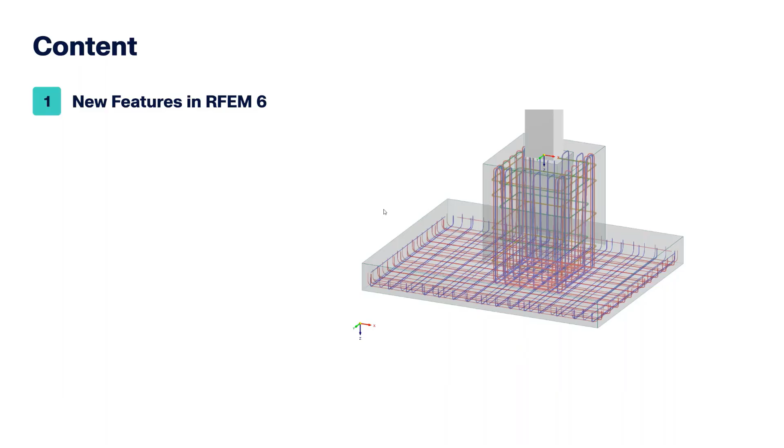For today's agenda: first I will show you new features in RFEM 6. Of course most of them are also valid for RSTAB 9, but as you know, if there are solids or surfaces, then it's only valid for RFEM 6. Then I'll show you new features in the add-ons and standalone programs, then new add-ons, and I'll look into the future at the end of the webinar.

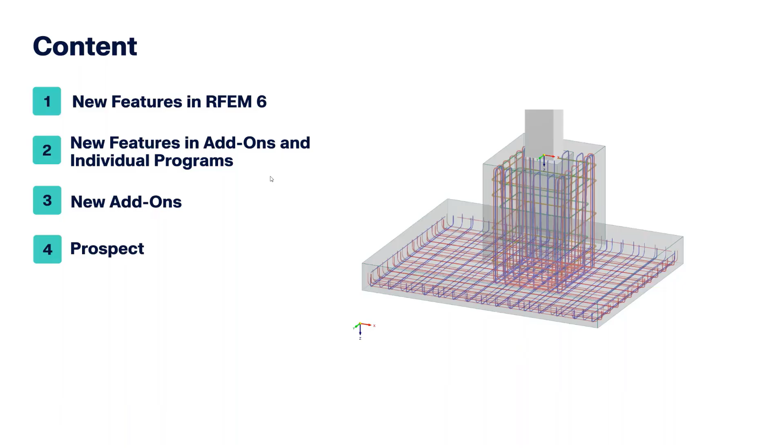Let's start with the features in RFEM 6. First, the result points. You can set such result points very easily on surfaces, solids, and also in the space for RWIND. Let me show that in RFEM 6.

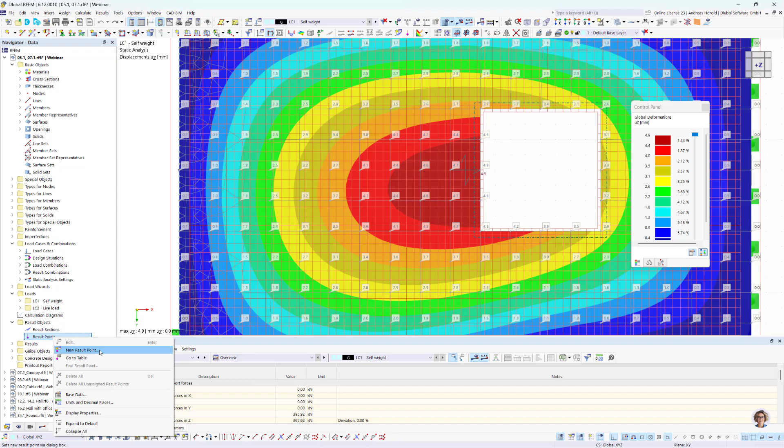In RFEM 6, you can find the result points in the navigator data under result objects. If you right-click on result points, you can select new result point, then select any point in the system, and the surface is detected automatically, as you can see. And you can see the new result point, also here in the folder under result points.

Much easier is to use that button above, new result point, and you can easily set certain result points, and they are also here. And if you want, you can delete any surface result point. Okay, that's all for this feature.

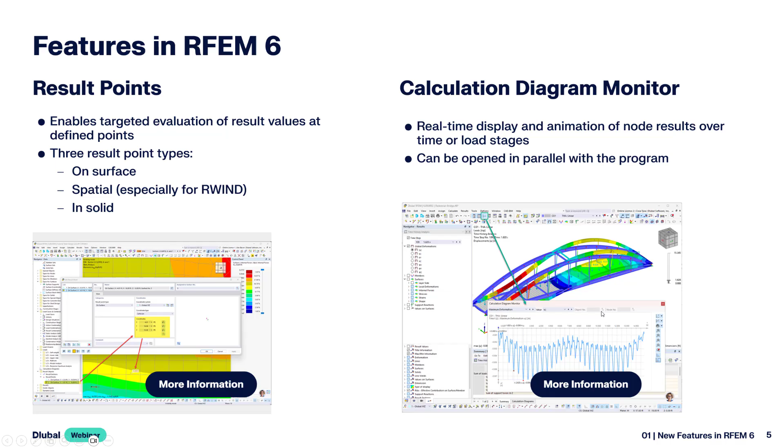We turn to the next feature, back to the PowerPoint. New is the calculation diagram monitor. You can use that, for example, for dynamic analysis or something like that.

Then the thickness type wall shear free. If you want to use, for example, a masonry wall in a 3D model, and it shouldn't stiffen the system because of the masonry wall, then you can use such a wall shear free.

Then the new member type result line. It's the same function as for the result members, but you don't need to define a cross section. Only the result line and the area that you select will be integrated. For this area, the results will be integrated in the result line.

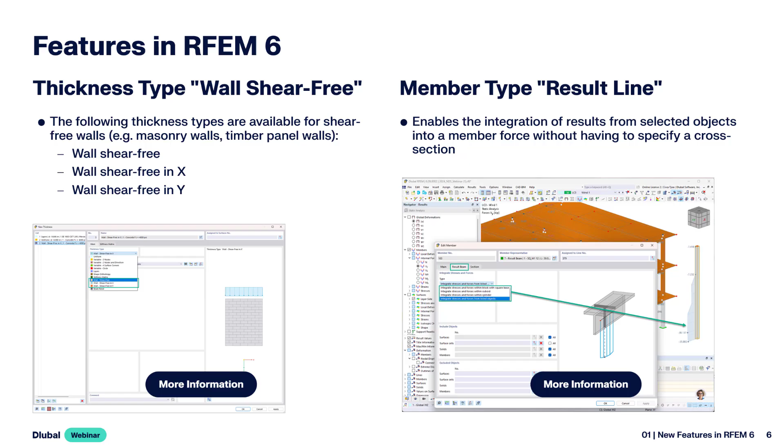Then error messages for invalid and deactivated objects. You can see the error message before the calculation. I will show that in the program.

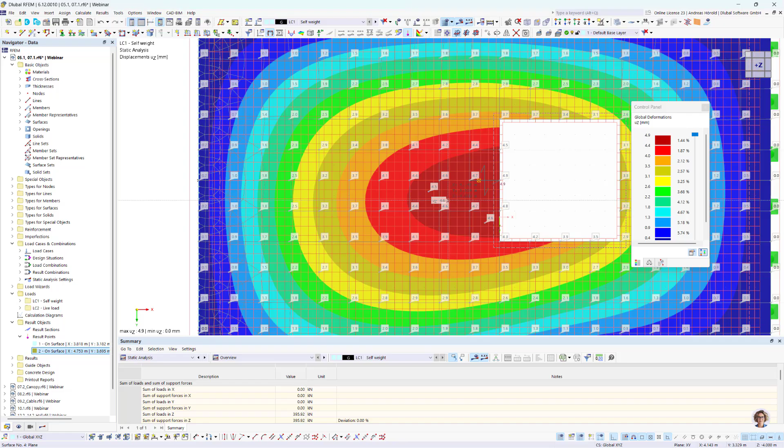The same model, a model of reinforced concrete. If we switch to the concrete design, where all members and surfaces are selected, and also the nodes with punching, that makes no sense in that case - we don't have a support in the middle of the surface, for example. So you can see under overview where the error messages are before you calculate the model. And for example, if we deselect all the punching nodes, then there's no error message.

Okay, then next feature: life cycle of design results. The results will not be deleted if you want, but they are declared as invalid. And when the calculation is restarted, only the invalid results are updated.

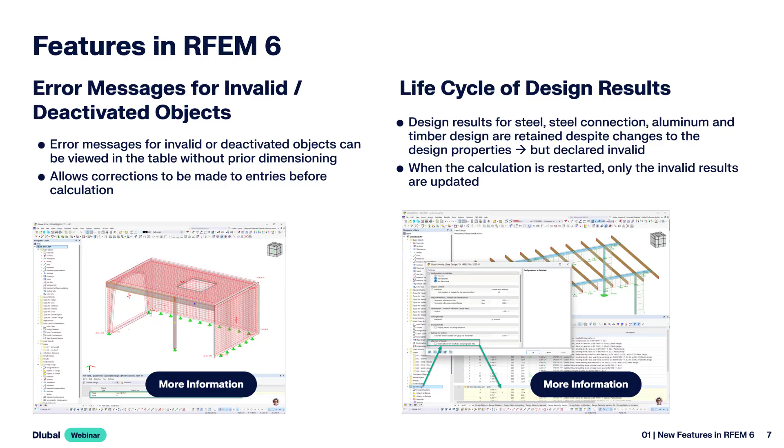I would like to show you that also in the program, on another model. For example, for this model, the timber design of the purlins was already done. And if you change the settings for one of these, or for all - for example, I enter or change the service class from moist to wet - then all results would be deleted. We don't do that at the moment.

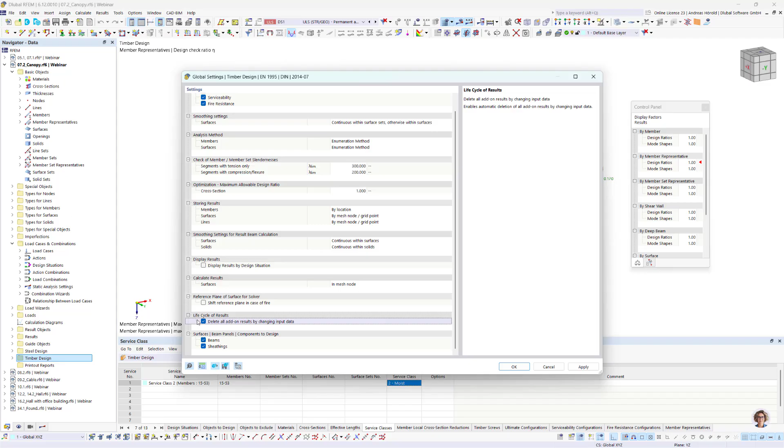First, I turn to the timber design here, right-click on it, then settings. If I don't want to delete the results, I have to uncheck this - this was the default setting, with the check, and I uncheck it. So now when I change to wet, the results won't be deleted, but they are declared as invalid. And if I recalculate all again, then the invalid results will be overwritten.

Often with wished features from our customers. So then the next one: you can now log in via your Microsoft account.

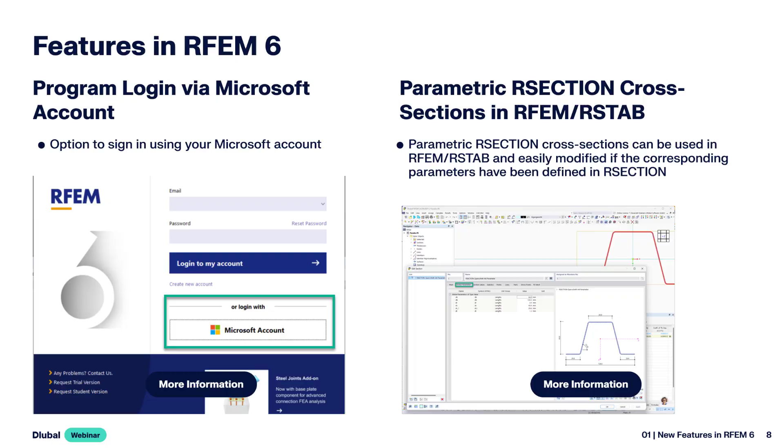Parametric cross sections that you parameterized in RSECTION can be used in RFEM 6 and RSTAB 9, that's clear. But the parameters can also be changed directly in the main programs, RFEM and RSTAB. I would like to show that as well. That's a parameterized cross-section in RSECTION. Take a look at the parameters - they are changeable. You can do that here, of course, but also in the main program.

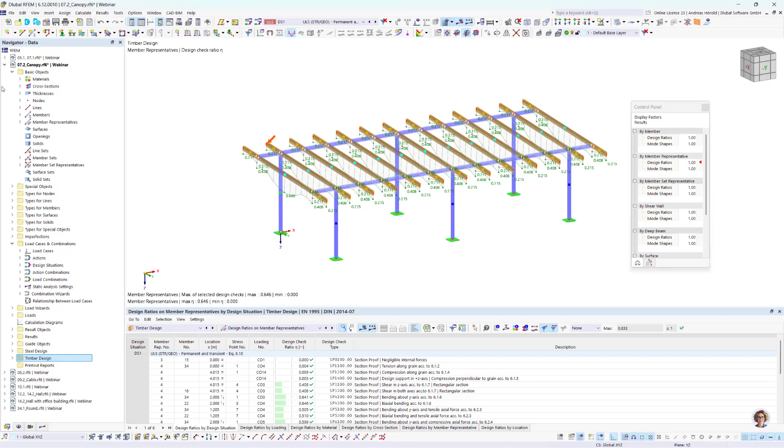So I change to that model. The parameterized cross-section is used. If I double click on it, then I can change the parameters here. And you can see all will be changed.

Okay, then the next feature: the Dlubal API is new, the gRPC. It's up to 15 times faster than traditional technologies such as SOAP or REST.

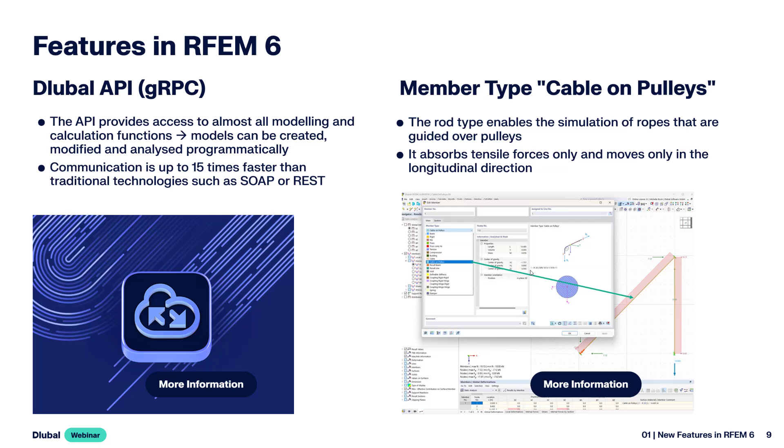Then use also the member type cable on pulleys. We had this feature already in RFEM 5, but now it's also available in RFEM 6. You can simulate ropes that are guided over pulleys. I showed it also in the program.

On the next model, you can see that simple model. At the moment, it's only a cable. You can see the internal force, 20 kilonewton, is only in this member here.

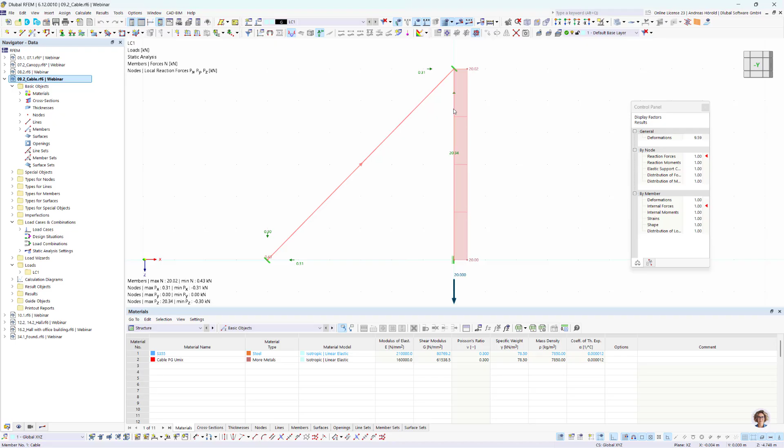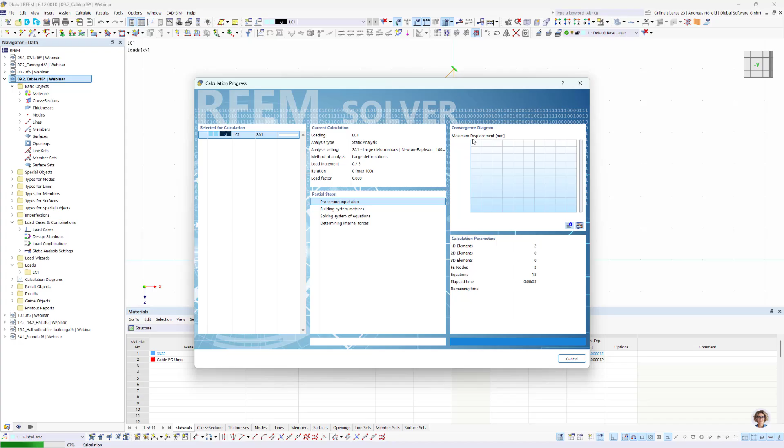And if I change both from cable to cable on pulleys, and then recalculate all, then the internal force of 20 kilonewton should be in both members - also in the diagonal member here.

Okay, next feature: nodal link type for nodes. Nodes are automatically connected to neighboring objects. I would like to show that also in the program. You can use that when you import models from a CAD program, for example.

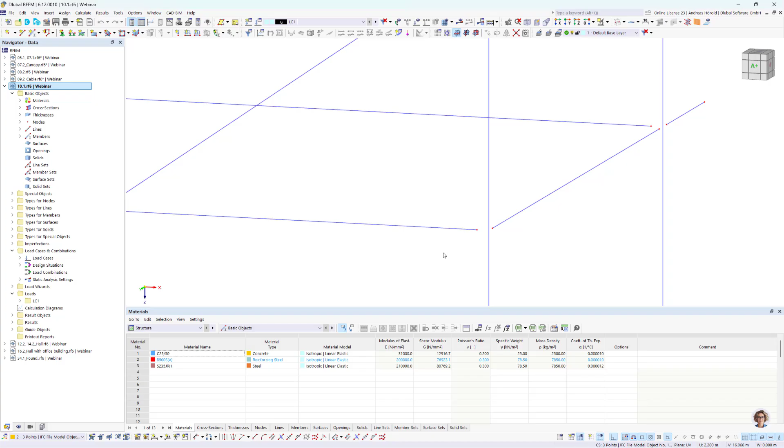Let's show that on the example. Imagine this model was imported from a CAD program, and if you switch to the wireframe model, you can see the members are not connected. You can fix that quite easily when you select, for example, all the nodes, then right-click on one node, edit, and then link - that's the new feature, link to nearby objects.

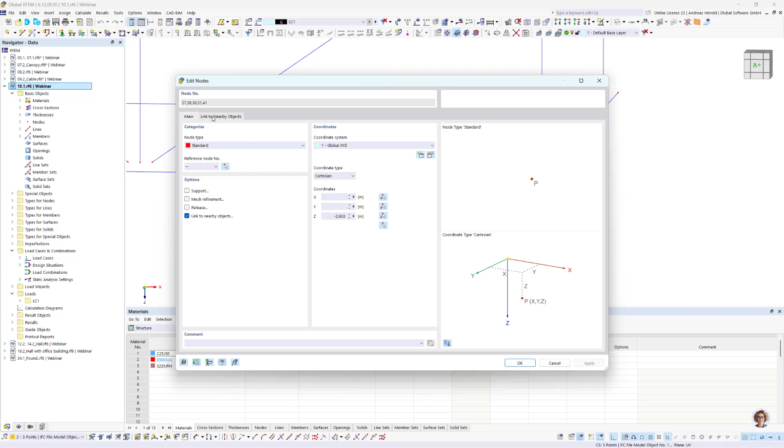So I have to create a new nodal link, connect or link to members. Then you can enter a search radius, press OK. And now all is connected by rigid members.

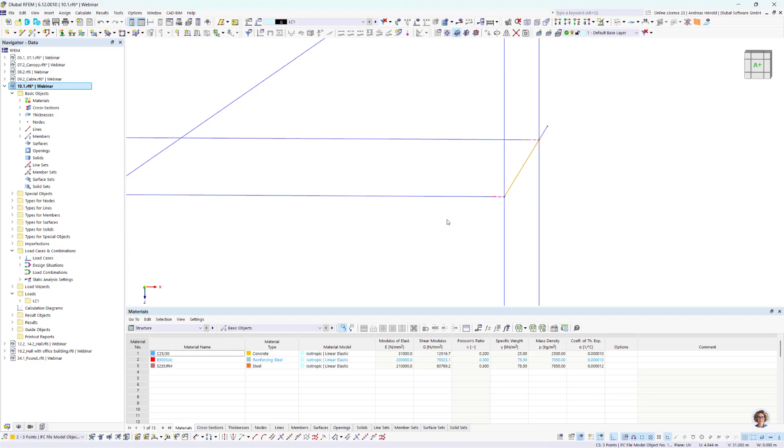What you also can do is - just a moment - I do that also only for these two nodes. New nodal link, I still do the same steps here, and you can enter a member hinge if you want, for example this one. Okay, and now there are member hinges. A good feature to select more nodes, not only these ones that I used, maybe a larger model, and you can do that automatically, the connection between the members.

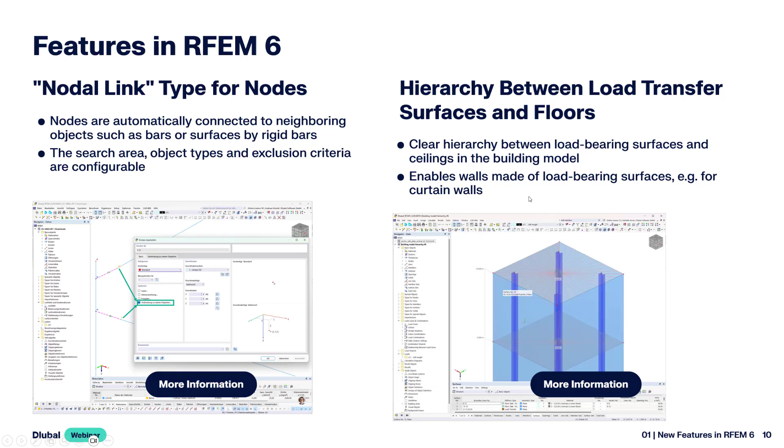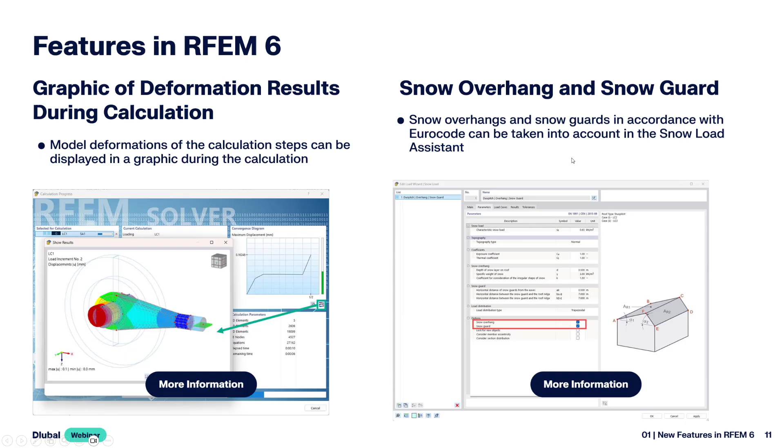So then the next feature: hierarchy between load transfer surfaces and floors. That's, for example, usable for curtain walls. Then you can watch the graphic of the deformation results during the calculation with that button here. Snow overhang and snow guard can be taken into account for the Eurocode.

Then you can use user-defined textures. For example, you made a presentation for the architect or for the owner, and you would like to use certain textures - you can use them. Then the import and export of Excel tables is possible, and you can customize the options for the data exchange. I would like to show that also in the program.

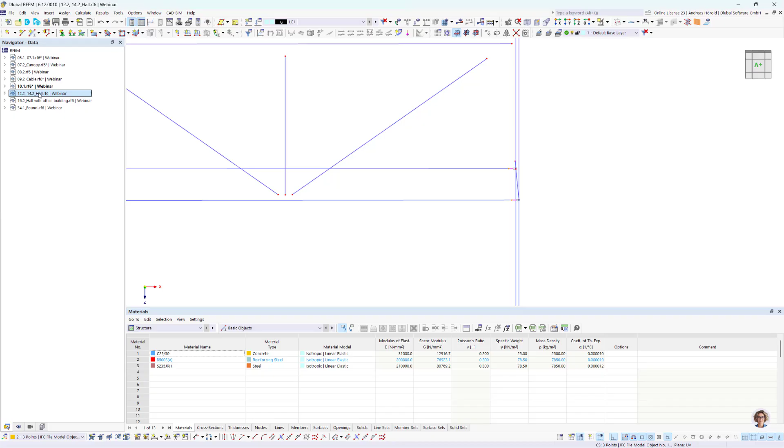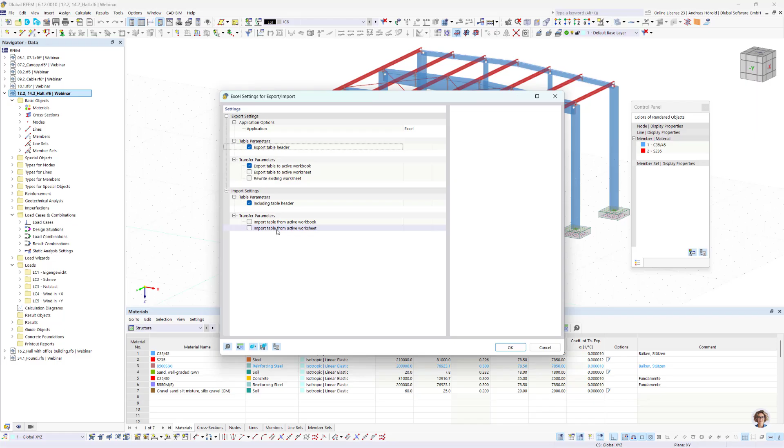So on the next model, you can change the settings here - the setting dialog for the export-import table. For example, you can select or export also the table header, and those are the other options. So, and then you can export to Excel. What is also new is export to JSON.

So I export it to Excel. That will take some seconds the first time. I already switched to Excel. So, and the table was created. You can do that also for another table, maybe the nodes. Okay, then we wait in Excel.

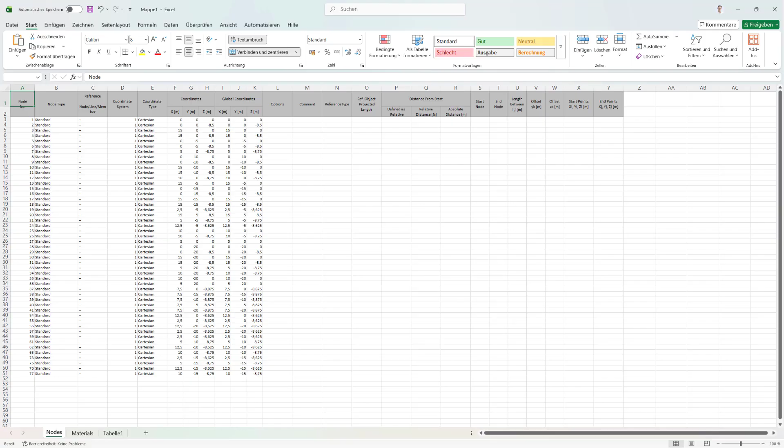So also this table was transferred. Then turn back to the slides.

New is the RTF export of the printout report. You can also export it as PDF or HTML. RTF can, for example, be used in Microsoft Word.

Then the scaffolding support is also new in RFEM 6 and RSTAB 9.

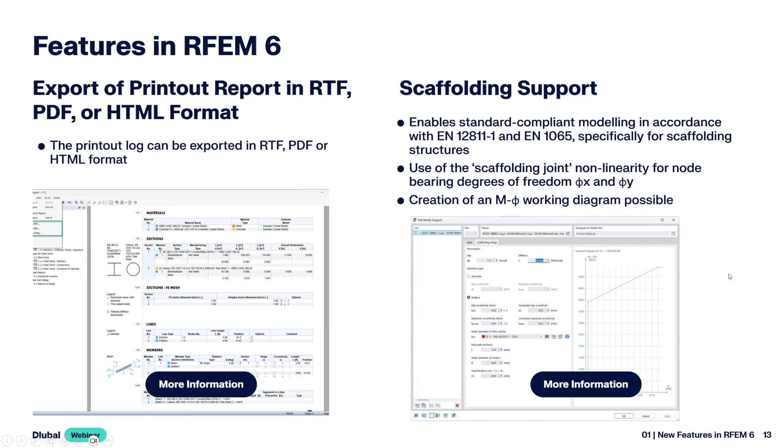Then the link type for lines, similar to the node connection I just showed you, the nodal link. If you have, for example, two surfaces, a slab and a wall, you can connect them with the same procedure that I showed for the nodal link.

Then multiple combination wizards are possible now. I showed it also in the program.

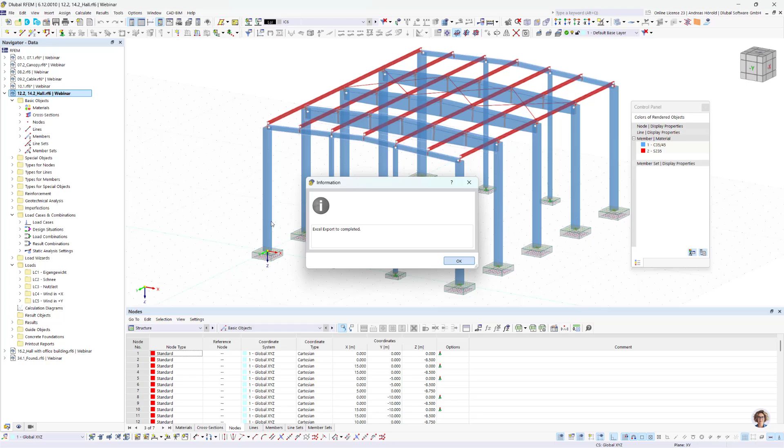So, for example, this model. Sorry, that was not the right model. That model. So let me switch to it.

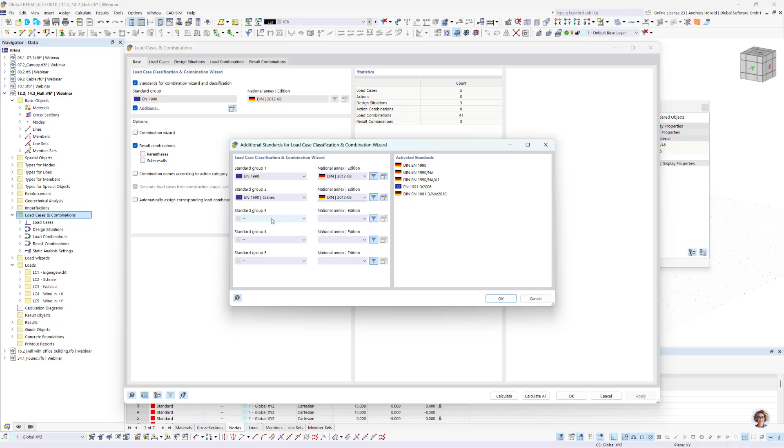So then you have to enter or open the load cases and combinations dialog. And then that is the new feature: additional standard groups for the combination wizard. If I press here, I can select up to 5 standards, for example for cranes and geotechnics and so on. It depends what you like to design in your model. For example, here cranes and the foundations.

Okay, so then we turn back to the slides.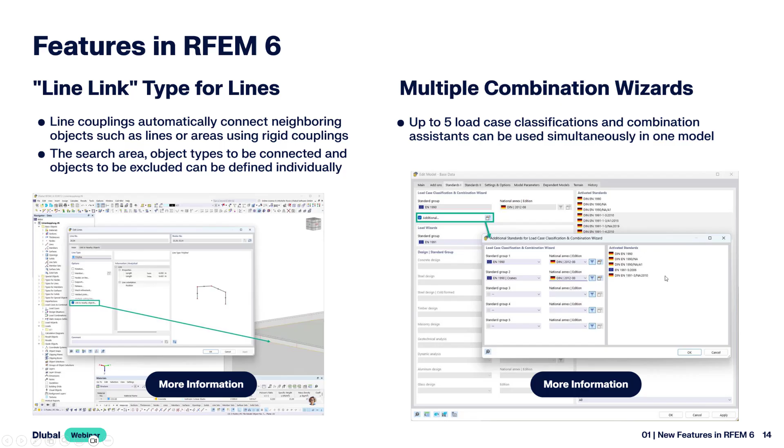You can round node coordinates. For example, when you imported a model from a CAD program and there are many decimal places, then you can round those coordinates.

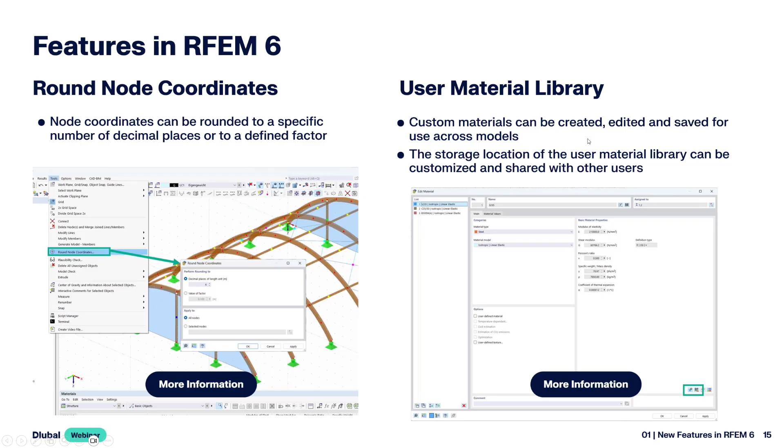Then the user material library is also new. You can define your own material. For example, you import material from the database and change it according to your material, what you like to define.

Then parametric rebar cross-sections is also new. Then you can export a DXF of a 3D scene. What you set in RFEM will be exported. I will show that also in the program, this time on this model.

If you don't want to export the nodal supports and the openings and so on, you have to deselect them. I will do that in the navigator display. For example, also the nodes, I deselect the nodes, then the openings - that means only the line around the opening - and the nodal supports. So then right click, export 3D scene to DXF. Okay.

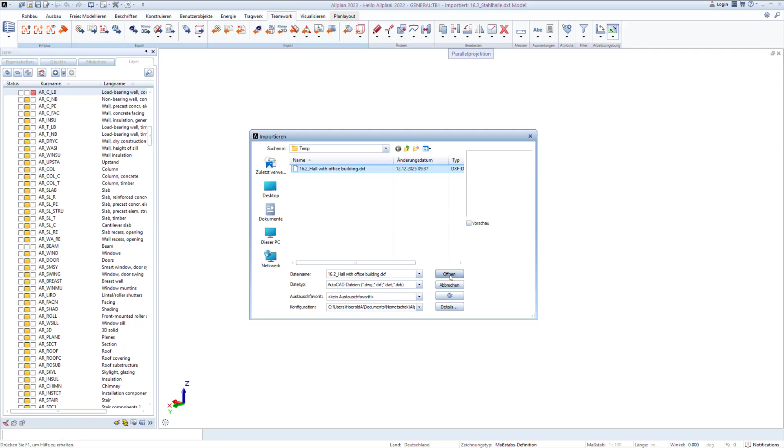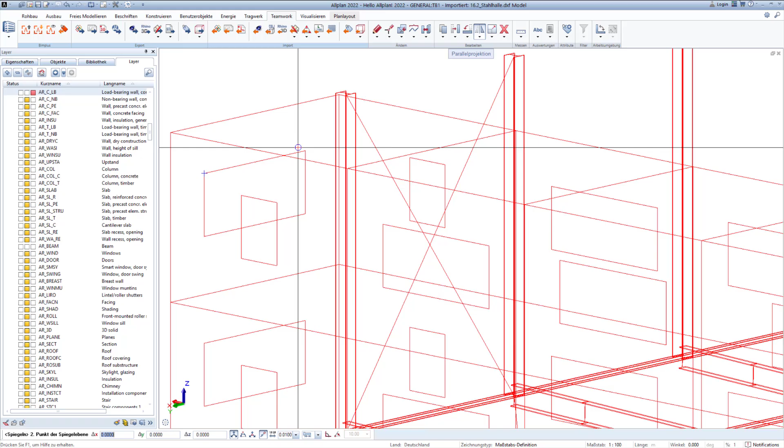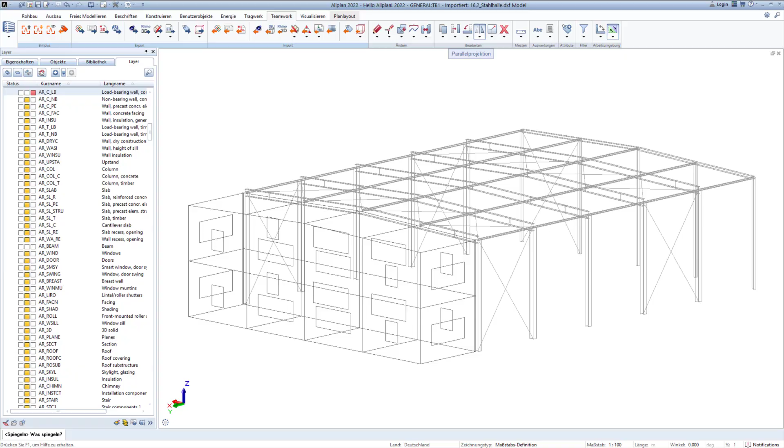So, and then I turn to a CAD program, in this case Allplan. I import this model or this DXF. Okay, the Z coordinate is upwards, but I can mirror all. It's no problem. So, and now you can see all what you wanted to export. You can now work in the CAD program with that model or with the lines. So then we turn back to the presentation.

That's a feature for America. The torsional moment due to wind is implemented, or was implemented.

Then the new member type load transfer transfers loads directly to the connected objects. And it has no stiffness.

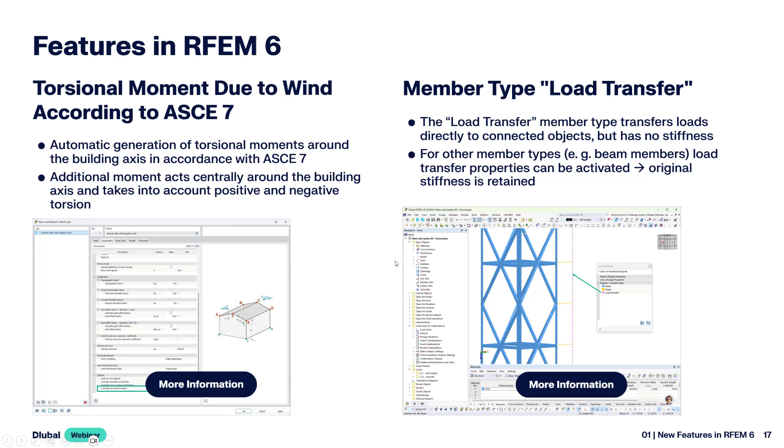I showed it also in the program when I showed you the Excel export. Also JSON is possible.

Then the Dlubal Center with API script management. You have different examples already here, and you can use them or create your own API scripts and manage them in the Dlubal Center.

So now we turn to the features in the add-ons. Features in the steel joints add-on. Those are the first features: definition of circular bolt or anchor layout. You can see that in the image here.

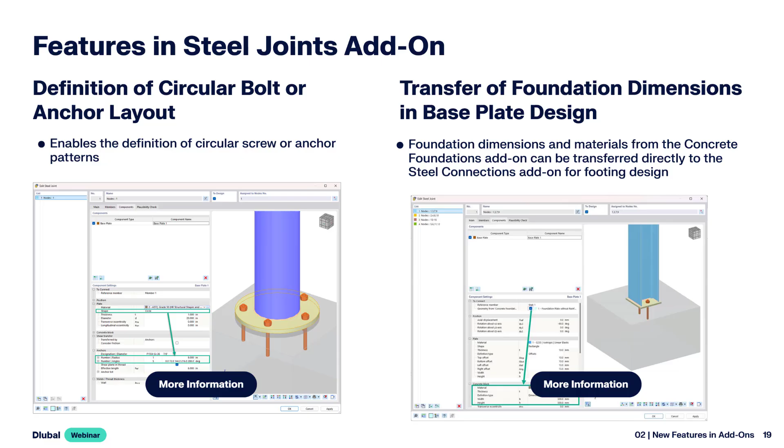Then you can transfer foundation dimensions in the base plate design. When you designed a foundation in the concrete foundation add-on, it can be transferred to the steel joints add-on. You can display the graphic of the contact stresses.

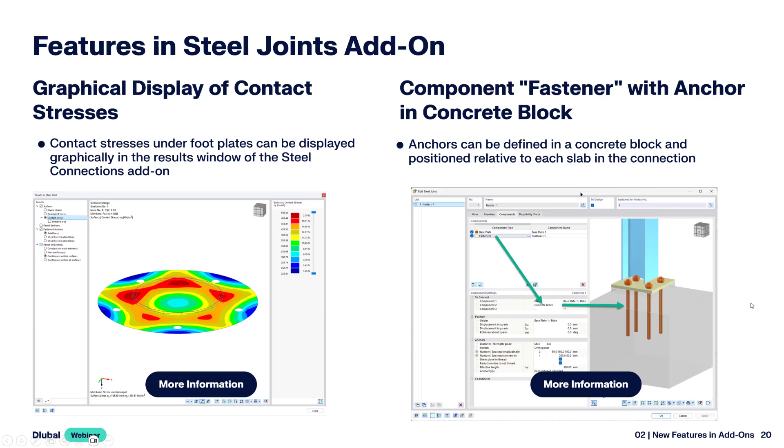Then component fastener with anchor in concrete block is new. Then the shear lugs are now available. For example, I, H, U sections and so on can be used there.

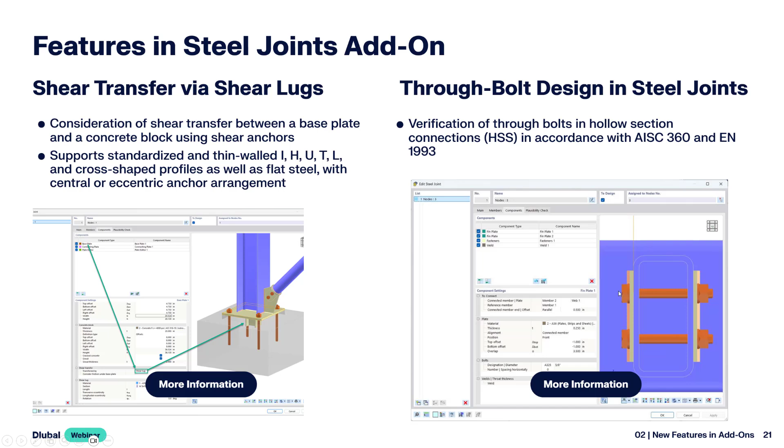Then through bolt design in steel joints according to American and also Eurocode 3 standard. And you can also export the 3D lines of the steel joints. It's a similar workflow as I showed in the program for the hull.

Then preliminary design of steel joints. The advantage is the acceleration of the design process, this preliminary design.

Then there are also more than the often used diameters available now, from M6 to M64, not only from M12 to M36. Then there are also hook anchors and headed anchors. Those are headed anchors in the image here, but also hook anchors are available.

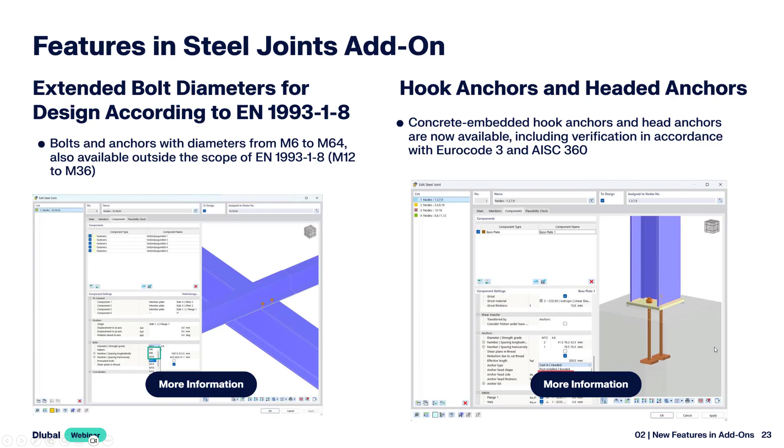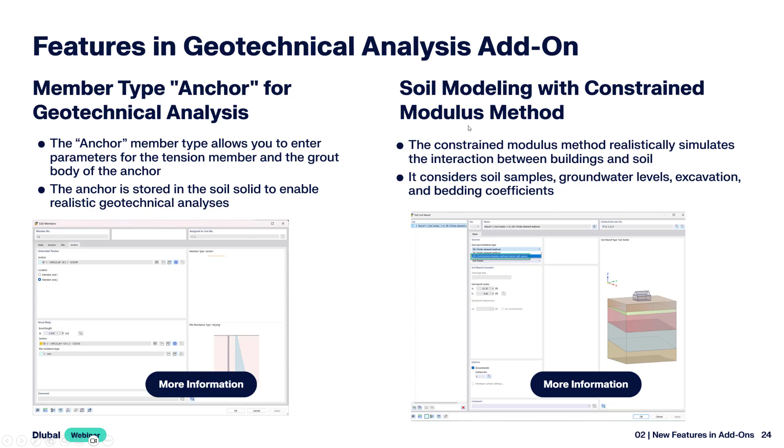Then the features in the geotechnical analysis add-on: the member type anchor is available. Then the constrained modulus method is also available now. And new is the generation of soil layers.

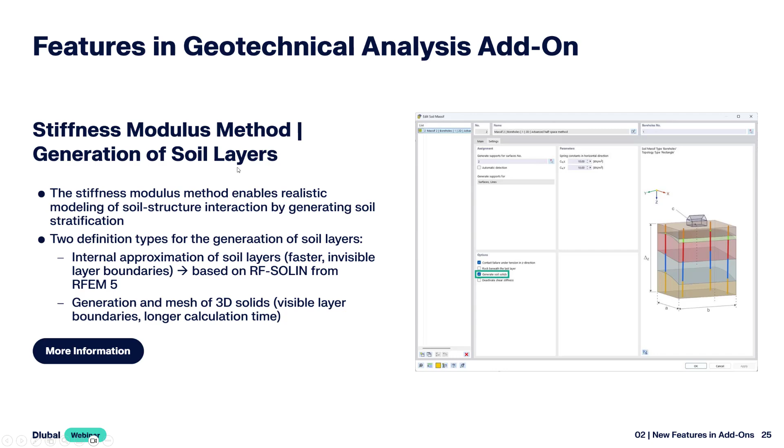Okay. Then the timber design add-on: the beam panel, semi-rigid joint of sheeting for the different standards. Then the design of compression perpendicular to grain at nodes with several members. Imagine you have a node where more than one member is connected, then you can select the different members that will be considered for this design.

Then features in the steel design add-on. You can now analyze cold-formed sections. And new is the partial internal forces method for the plastic design according to Eurocode.

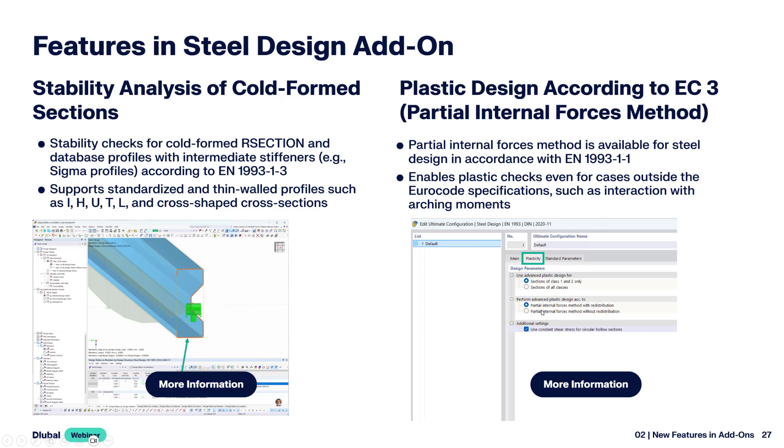Then the design of surfaces is now possible, also for aluminium surfaces. Then the critical steel temperature for fire resistance design can also be used now for the design according to Eurocode 3-1-2 and this paragraph.

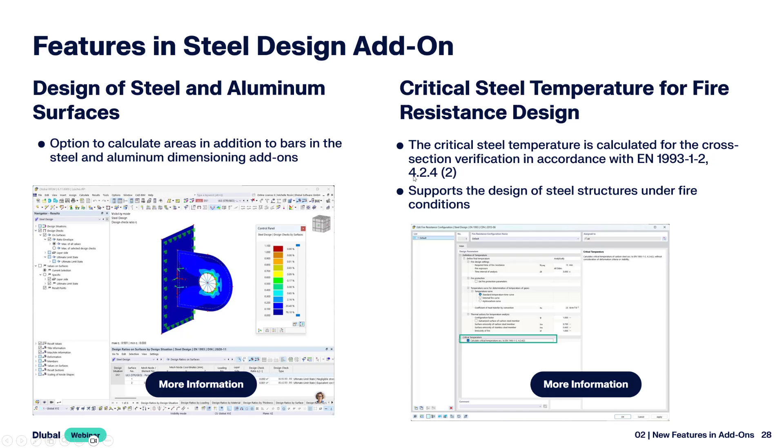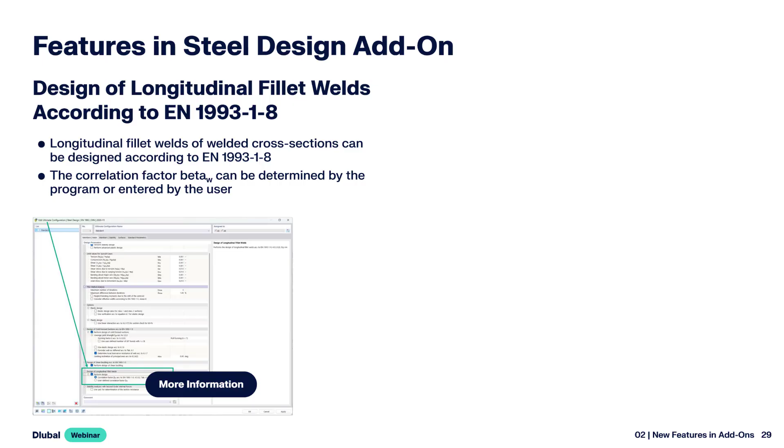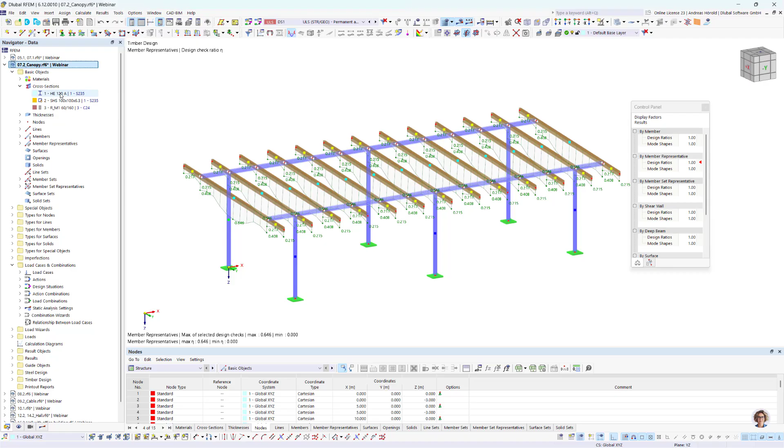You can design longitudinal fillet welds according to Eurocode 3. I will also show that in the program, in a model what was designed. So imagine those are HE120A, and we would like to change that cross-section to a welded cross-section.

So I go to the library, thin-walled. The parameters of the previous cross-section are proposed now here. I use them, but I have to change the manufacturing type to welded, and I can enter a weld here.

Then I have to activate the weld design in the navigator data under steel design. I have to change the ultimate configuration, and I have to check here: design of longitudinal fillet welds, perform design.

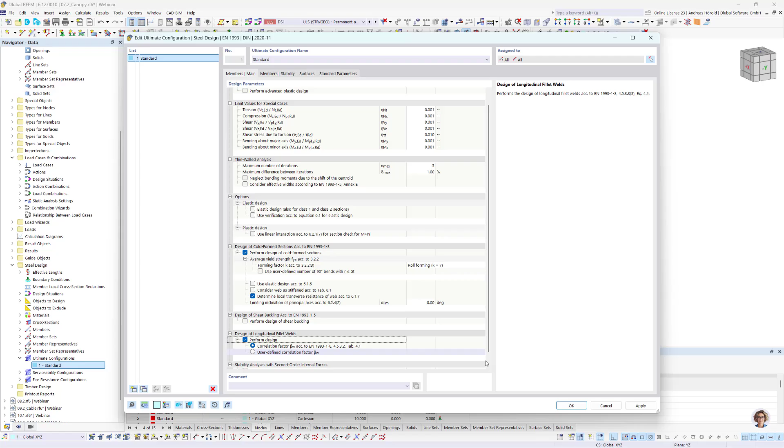You can use the correlation factor according to Eurocode, or you can enter a user-defined correlation factor. The factor depends on the material; in this case, it's 0.8 for S235. So then we run the steel design.

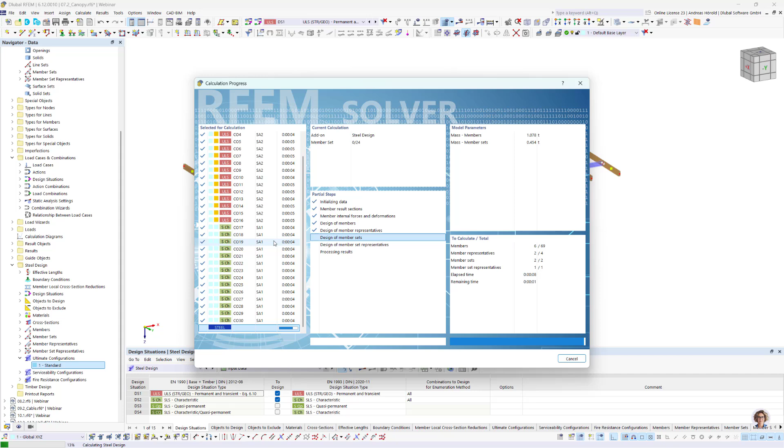All load cases and combinations are redesigned or recalculated, but with the multi-core calculation, it takes only some seconds. So then let's turn to the results.

You can see I have to select the ratios by cross-section. Okay, that's the right cross-section. And you can see, let me check, here: section proof design of governing longitudinal fillet weld. I can double-click on it.

That's the formula. You can see the correlation factor here, 0.8, and the design ratio. You can print the design check and the formulas in the printout report or directly in the printer.

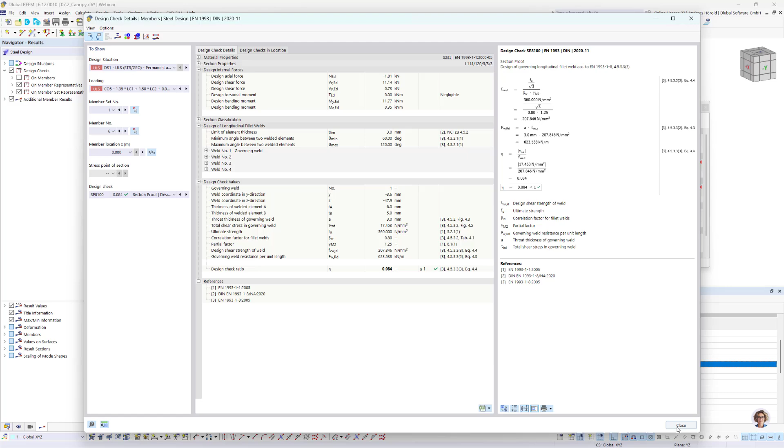So then we turn back to the presentation. Features in the add-on: steel design, glass design, aluminum design, and timber design. The features: serviceability, minimum or maximum relative absolute value.

As an example, you have a single span beam. The maximum deformation should be L divided by 300, but also the maximum deformation should be, for example, 20 millimeters. And you can define this value now also here.

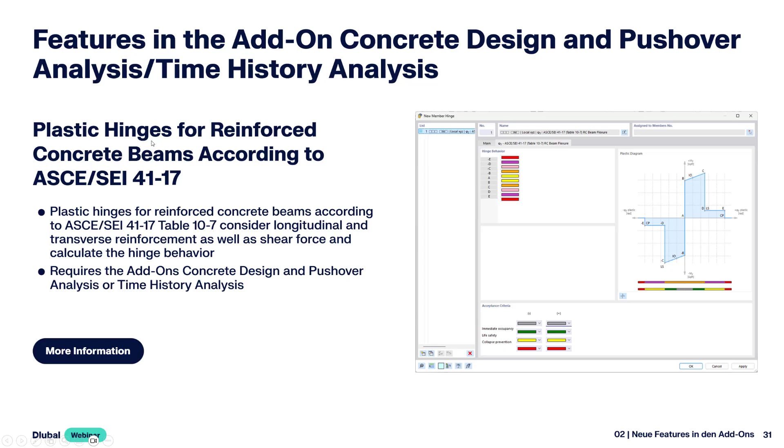So then features in the add-on: concrete design and push-over analysis. The plastic hinges according to the American standards are now available. Then concrete design, design strips.

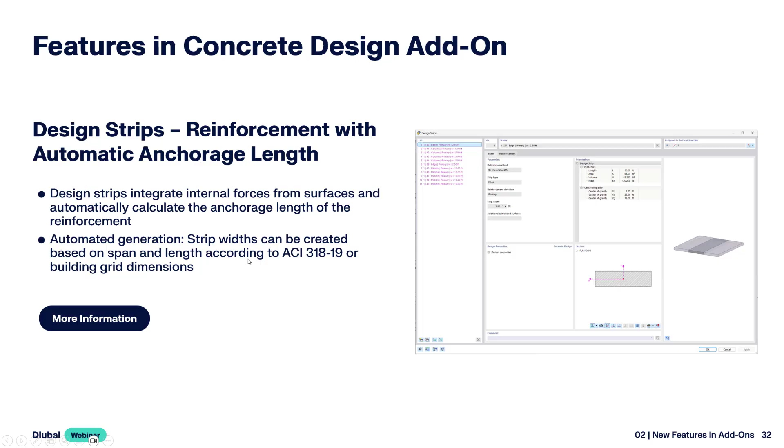Design strips, that's also a feature for the American users. Then the rebar member type is also available. There's an automatic connection function to other elements, surfaces, and so on.

Then the punching reinforcement types according to the American and Canadian standards, we will implement such bolts and so on also for the European standard. That's planned.

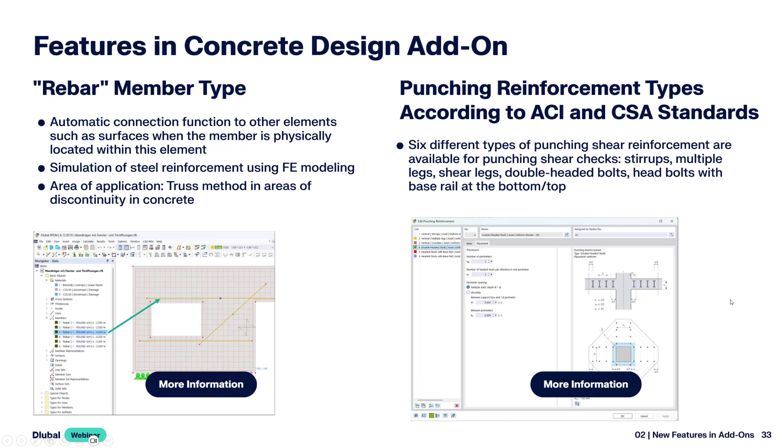Then the features in the concrete foundations add-on: foundation type bucket foundation, that's new. Then also the definition of the multi-layered soil massive, and you can import the soil from borehole for foundations.

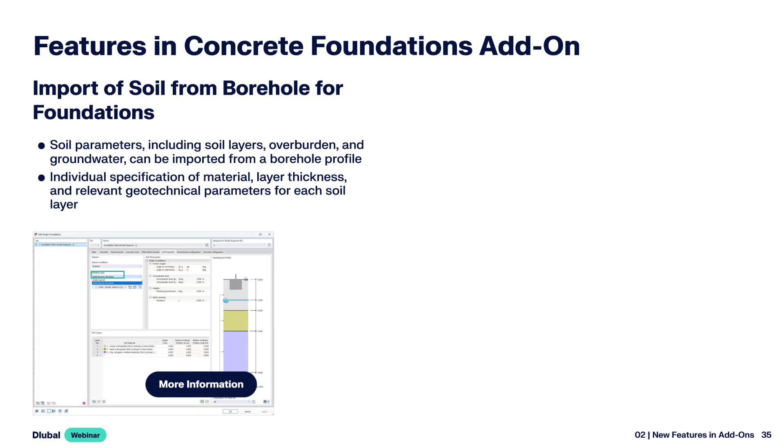I will show you these three features in the program. So that's the latest model for today. I click on one foundation here. There are the different types here.

Foundation plate, then without reinforcement, then the block foundation with smooth bucket sides or rough bucket sides, and quite new is the bucket foundation with smooth bucket sides and rough bucket sides. Block foundations, bucket foundations, and we will implement also the stepped foundations.

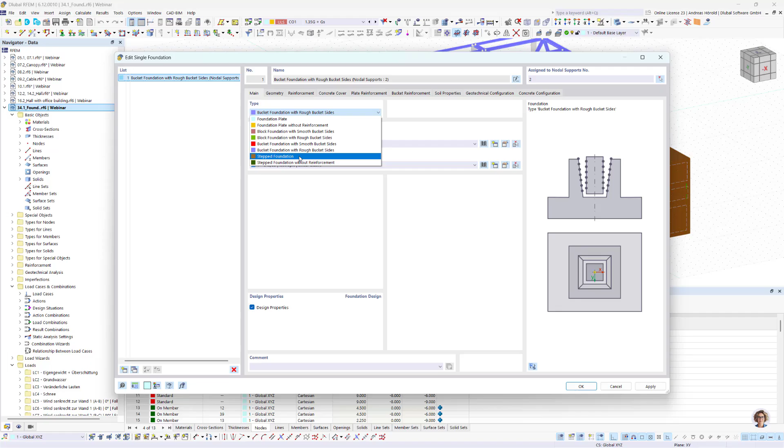You can define design properties. It's in progress.

Then in the soil properties, you can use define types: multi-layered soil massif and multi-layered borehole. Those are the new features.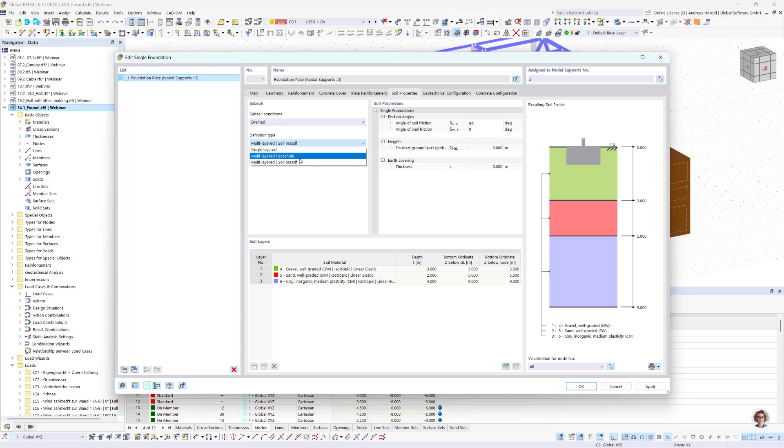Let's turn back to the presentation. Features in the construction stages analysis add-ons: you can modify design properties for the different construction stages.

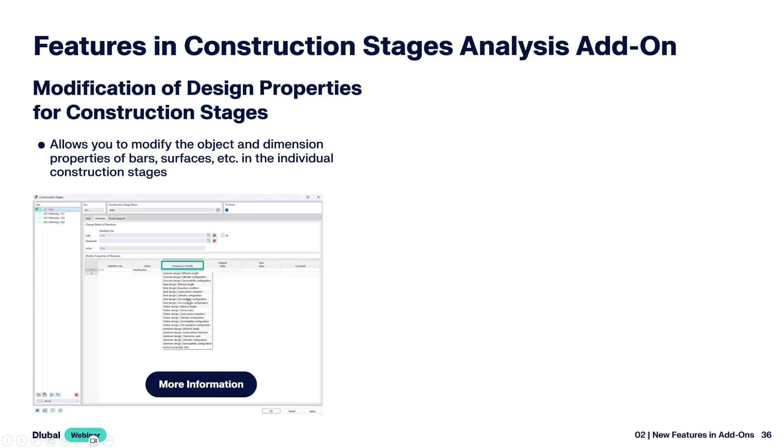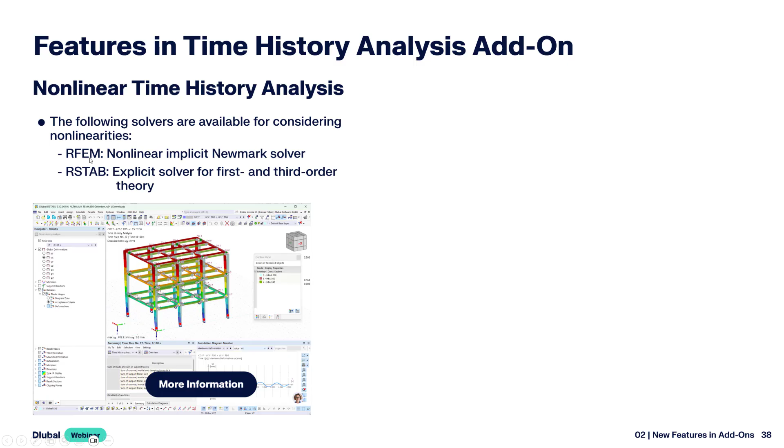Then new in the time history analysis add-on is the nonlinear time history analysis, where there are different solvers for RFEM and RSTAB.

Then new in the glass design add-on: the glass composition model. You can do a glass design according to the American standard as well, and of course also the German standard.

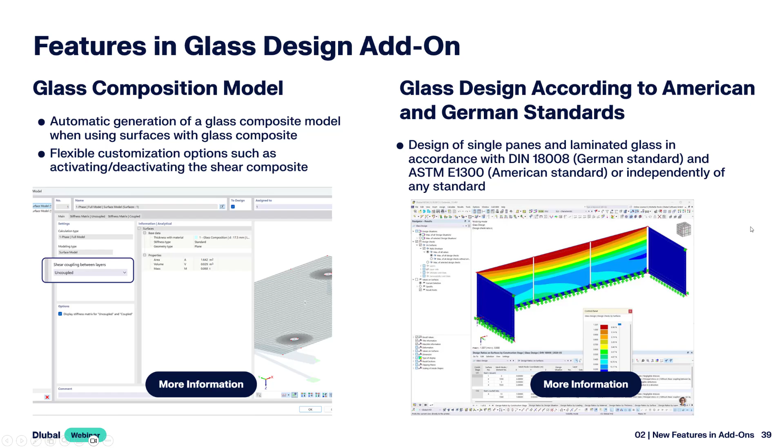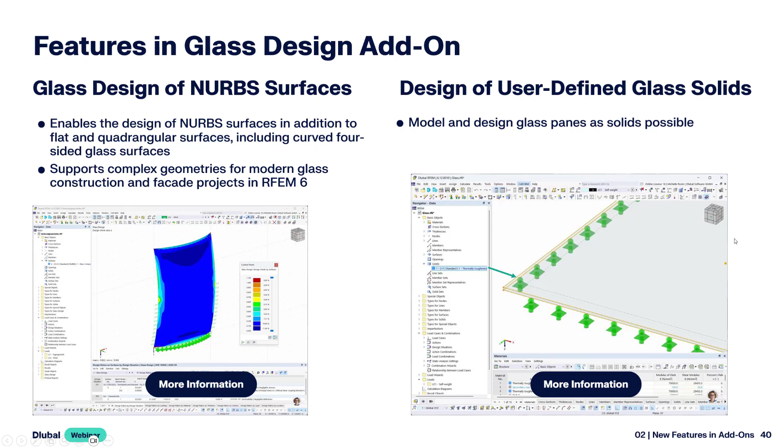Then you can use NURBS surfaces. Now you are very flexible with the surfaces of the glasses. And you can design user-defined glass solids.

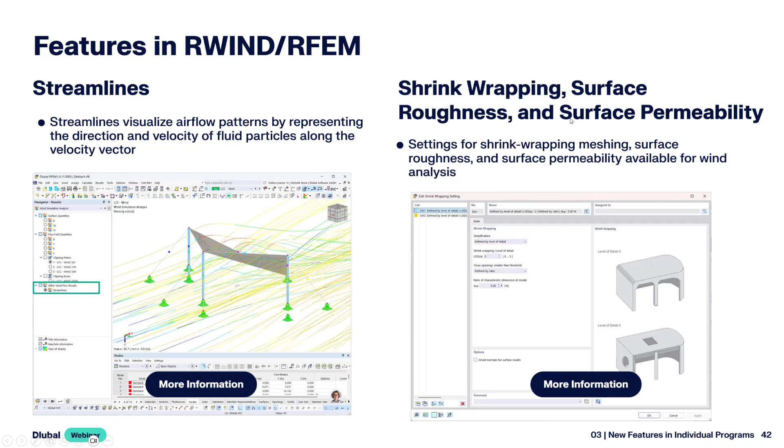Then you can show the streamlines, not only in RWind, but also in RFEM. And use also the shrink wrapping, surface roughness, and surface permeability.

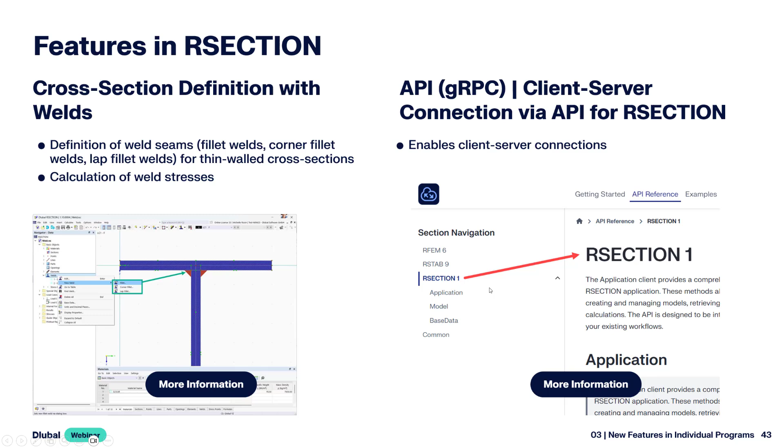Then features in RSECTION: the cross-section definition with welds is possible. RSECTION can now be connected to the API. You can see that also in the client server, not only for RFEM 6 and RSTAB 9, but also for RSECTION now. Then we turn to the new add-ons.

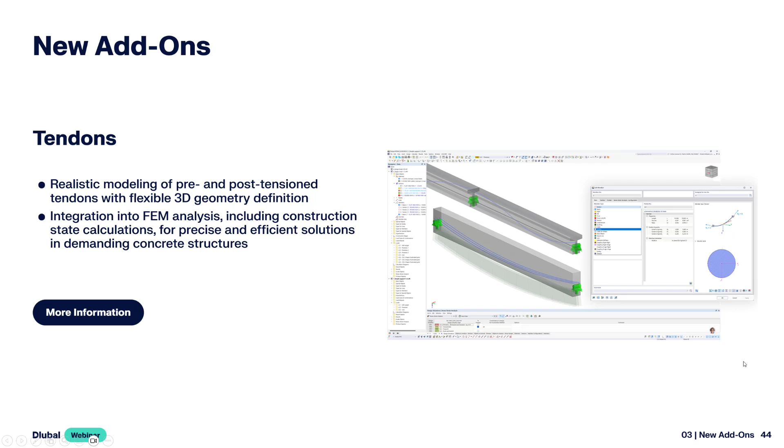That's the tendons add-on. It's currently in beta status, but it works already fine. We already have 2 customer projects, and they used the tendons add-on and got very good results.

Then the cutting patterns add-on, also in the beta version. That's quite new, but we were still working on it.

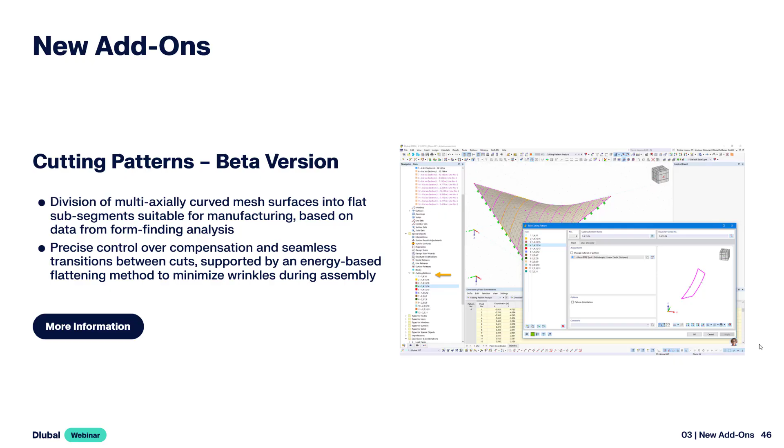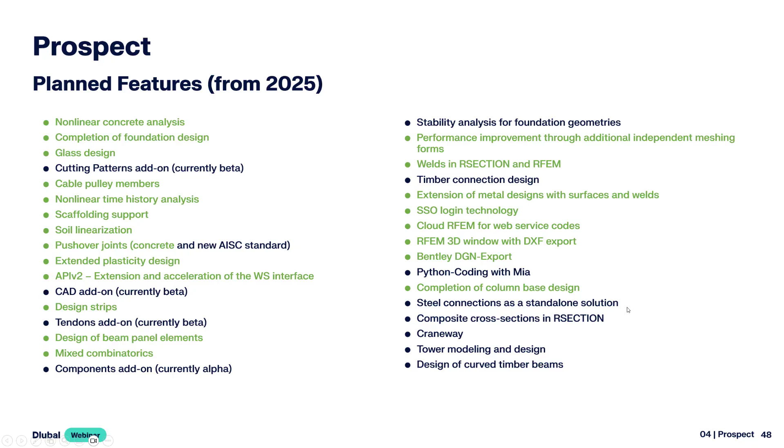So then we turn to the last point for today, the prospect. That was the plan that I showed one year ago. For this year and the future, we implemented all the green features. I showed you some of them, the cable pulley members and so on. So, and that's the plan from now for the next year and the next years.

Let me explain only some features. For example, the Mia extension. That's a modeling support. We will implement voice control, and for example, you can say, move the model from here to there.

Then automatic imperfections. You can approach imperfections according to the stability analysis automatically. That will be quite easy to handle.

So then slope stability for the geotechnical analysis. And then, as I already said, the anchor bars for punching shear according to Eurocode, not only for the American standard. Then the BRB elements, aluminum and steel joints design according to the Canadian standard.

Automatic dimensioning of connections. Then we will update the GeoZone tool, an update of the user interface that will be more powerful. Then bracing surfaces, it will be a global object without supports. So then, library for live loads.

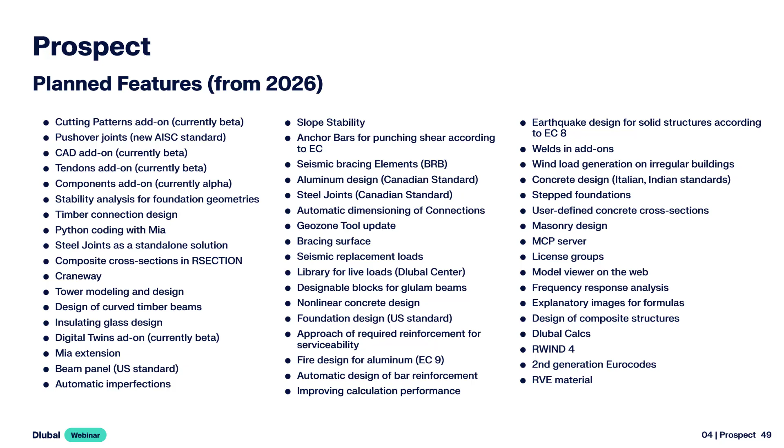Okay, that should be all for the four points for today. At the end of the webinar, I have an additional hint for you.